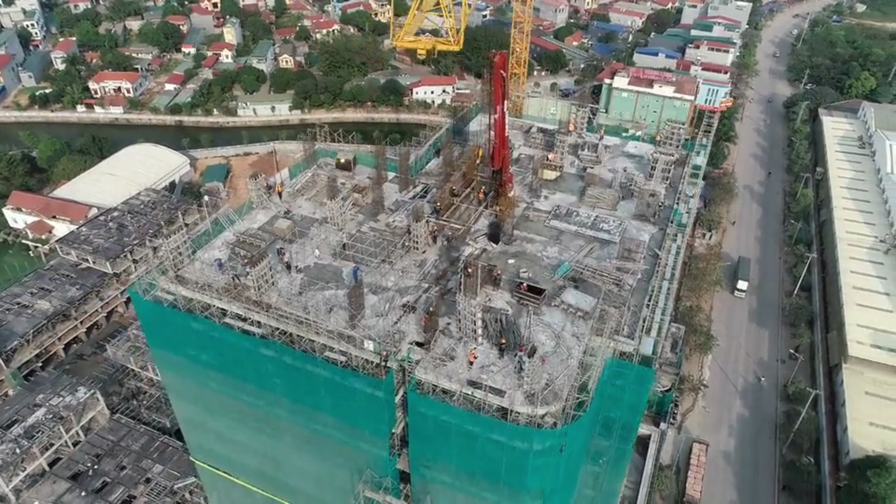So falls, being struck by an object, electrocution, or being caught in between equipment. These are the four most common causes of accidental deaths and other injuries.

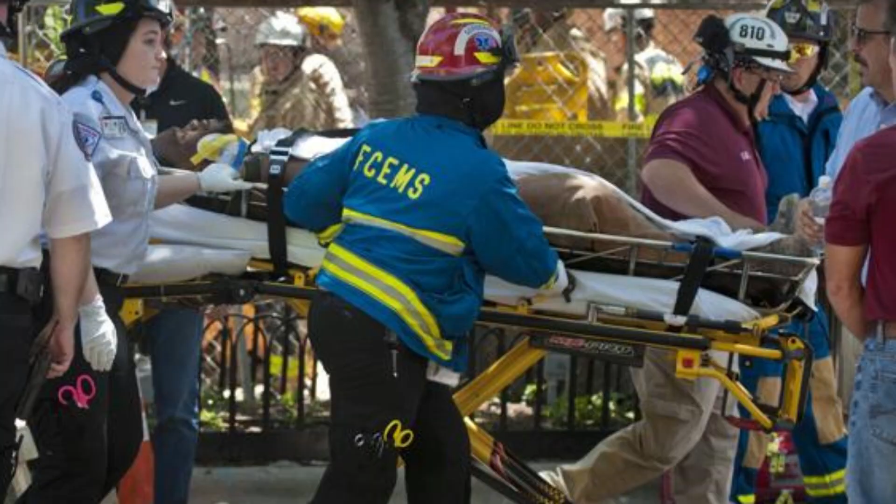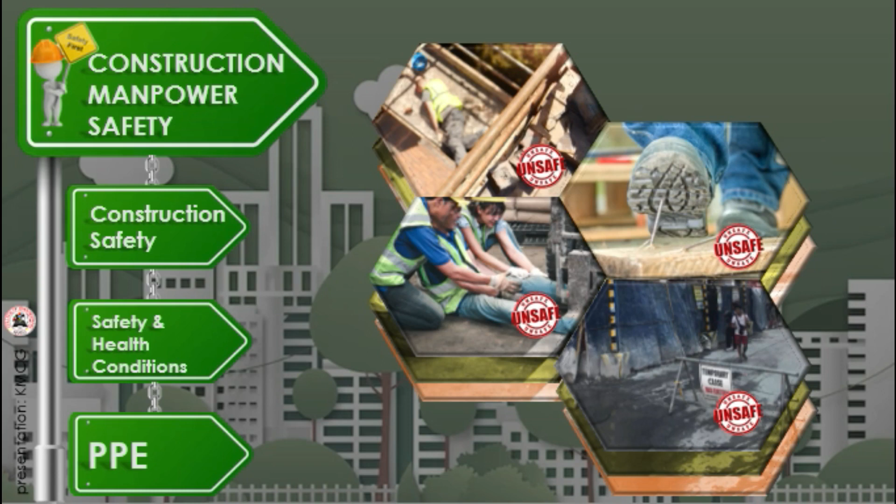Inadequate safety protocols can allow objects to fall on innocent bystanders, putting people not even connected to the project at high risk. So having a culture of safety practices and awareness reduces the risk of these types of accidents.

As discussed in your course subject, you might have encountered this set of safety terminologies, but we'll just take a review. Accident.

This is an undesired event that results in harm to people and also damage to property or loss. Incident is a term used under circumstances that could have resulted in harm to people, damage to property, or loss. In short, incident is a term used for near-miss instances.

Safety is the control of hazards to attain an acceptable level of risk. Control means to regulate or restrain. Risk is the chance or likelihood of physical and personal loss.

Hazards are unsafe sources of practices or conditions that, if not controlled, may lead to the occurrence of an accident or an incident.

Unsafe practices or unsafe acts are behaviors which could permit the occurrence of an accident or incident. Behaviors. Unsafe practice or act is also a deviation from standard procedure or practices.

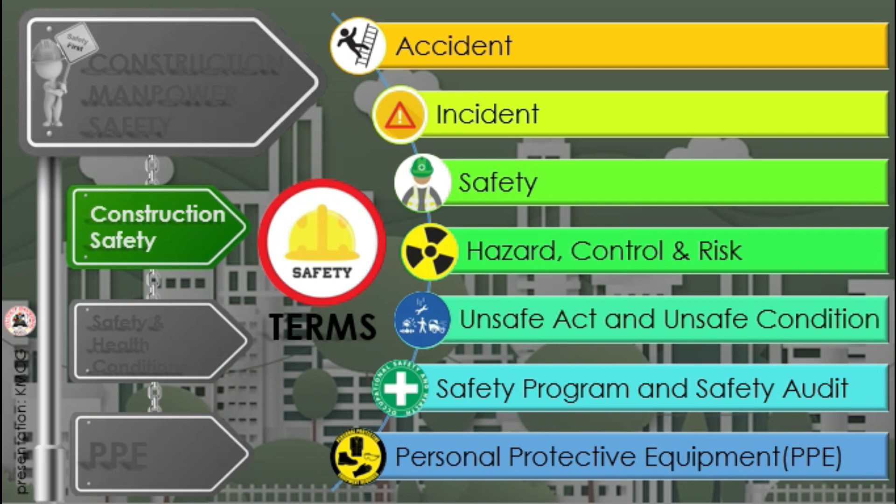These are wearable devices used to protect workers from injury or illness resulting from contact with chemical, radiological, physical, electrical, mechanical, or other workplace hazards. PPEs are also equipment that creates a barrier against workplace hazards.

Examples of unsafe acts versus unsafe conditions are as follows. Under unsafe acts, we have operating equipment without authority, while unsafe condition is inadequate guard or barriers. Unsafe act: failure to warn. For unsafe condition: inadequate or improper protective equipment or PPE.

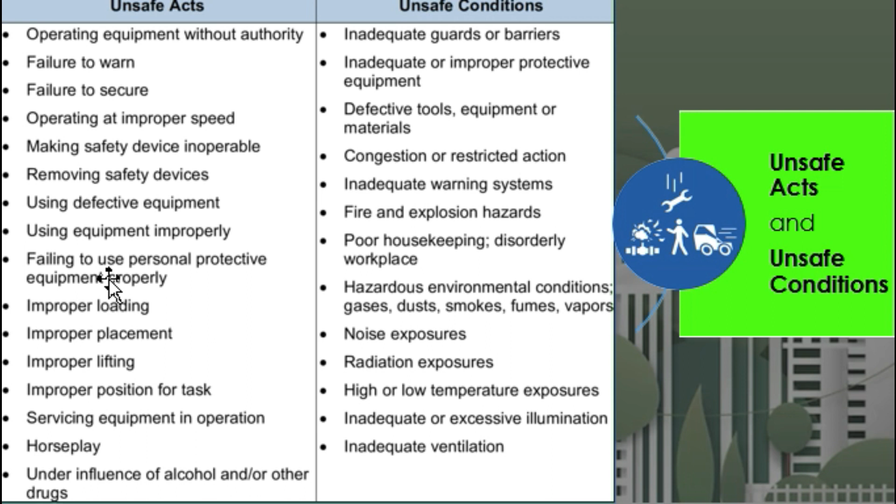We also have failure to secure for unsafe acts, while for unsafe condition, we have defective tools, equipment, or materials, etc.

Next, we have the facts and figures from OSH in the construction industry. 17% of the surveyed companies have experienced death in their present workplace. 71% have no first aid station. 72% of the workplaces do not have trained first aid personnel. 6 out of 10 claim that PPE were not issued to them, which is the liability of the contractor.

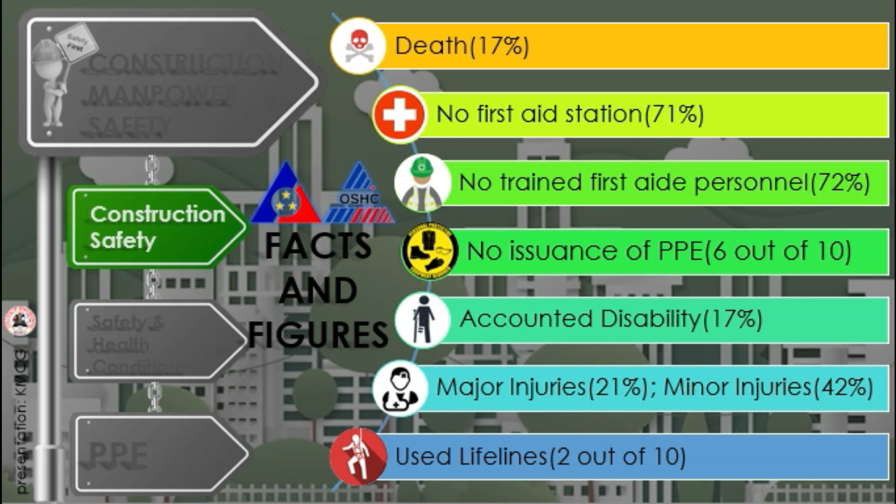17% of the surveyed companies accounted disability. 21% of the surveyed companies reported major injuries, while 42% have minor injuries occurring in their surveyed job sites, and 2 out of 10 used lifelines.

All accidents, whether minor occupational incidents or major accidents, cost money. It is normally straightforward to identify and quantify direct costs, such as emergency response expenses and regulatory fines, but there are often indirect costs which are hidden, less well understood, and seldom easy to quantify.

For example, it may be a simple calculation to work out the direct cost of wages that still need to be paid when an injured employee is off work for a week, but that is just the tip of the iceberg. It is much more challenging to estimate the indirect cost of redistribution of the injured party's workload, the selection and training of a replacement, or even the effects of reduced morale amongst the workforce.

Hidden cost of accident. We have here an iceberg. For direct cost, we have the medical and the compensation - that is the tip of the iceberg. While under the surface, we have the indirect cost, which are time lost from work by the injured, lost time by fellow worker, damage to tools and equipment, time damaged equipment is out of service, spoiled work, lost time by supervisor, hidden cost, loss of production, litigation cost, and also damage to corporate image.

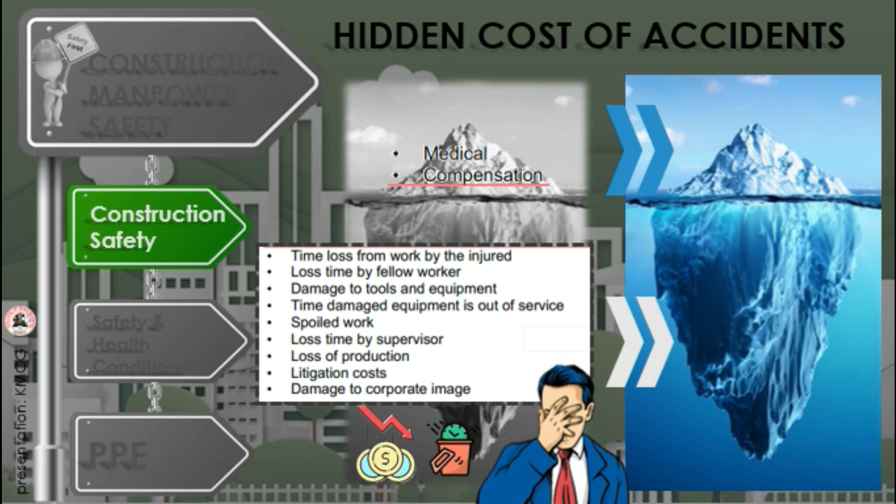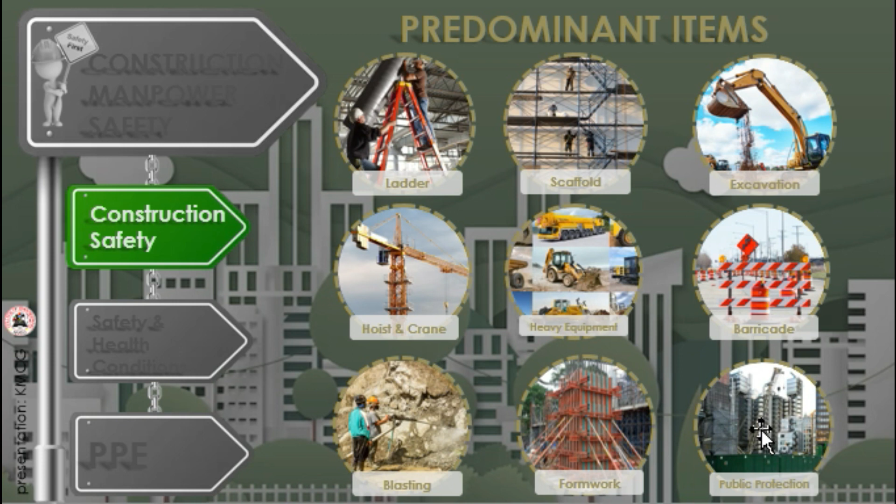The predominant items in construction safety are as follows. We have the ladders. Next, we have scaffold, excavation and shoring, tunneling, hoist and crane, heavy equipment, barricades, blasting, and then formworks. We also have public protection, which includes signages, safety netting, fences, and permitted hours of work also.

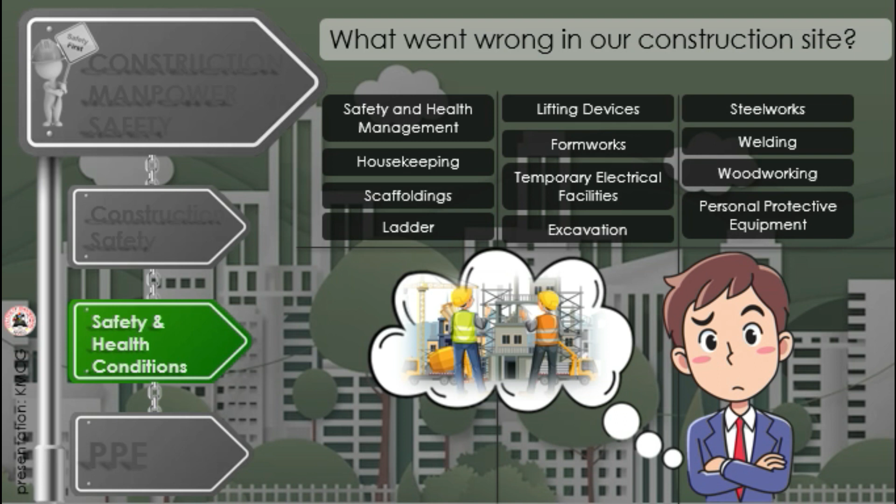Construction is a high-hazard industry that comprises a wide range of activities involving construction, alteration, and also repair, rehabilitation, or improvement. Construction workers engage in many activities that may expose them to serious hazards, such as falling from rooftops, unguarded machinery, being struck by heavy construction equipment, electrocution, and also chemicals, silica dust, and asbestos.

In order to provide a safe and healthy working environment, take time to observe the following instances which might be involved as a source of hazard. We have under safety and health management - unsafe practices may start due to poor compliance on the OSH committee or organization of the safety health committee.

Then we have recording and reporting of accidents or illnesses, poor compliance on employment of safety and health personnel. Then we have provision of adequate first aid medicines. For under lifting devices, the safe working load might not be indicated - this must be shown especially on the equipment's capacity or the SWL.

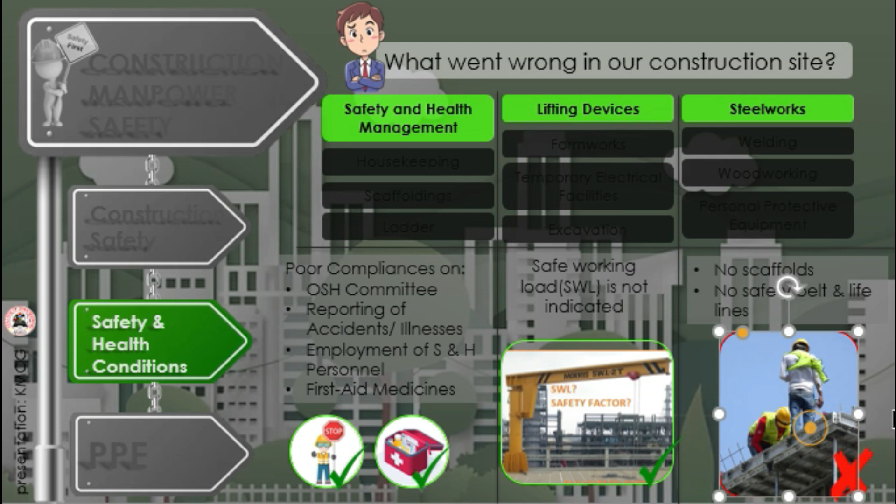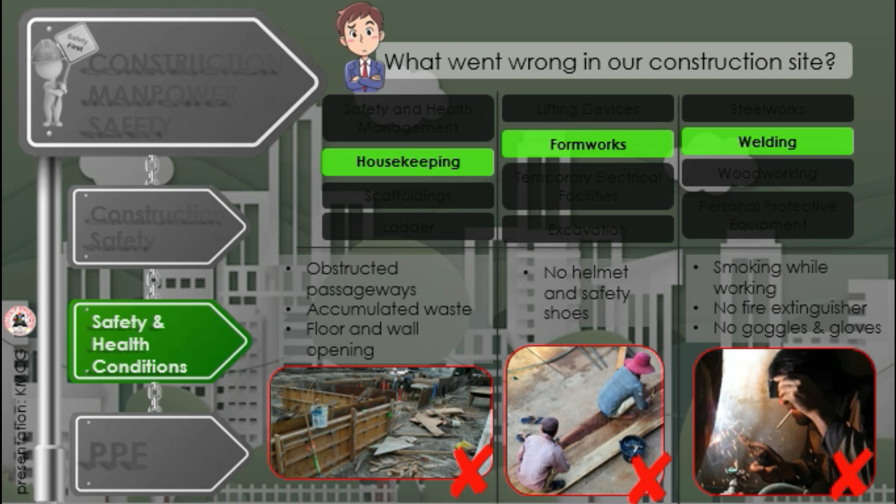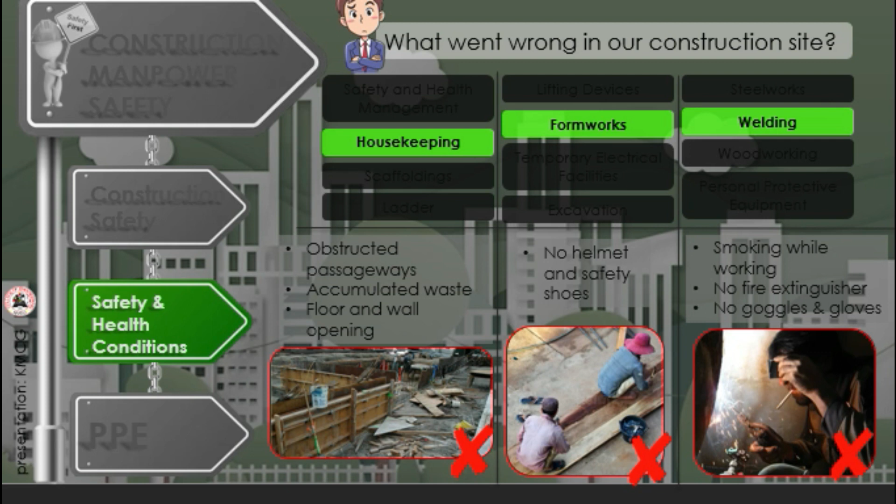Next, under steelworks, workers must be provided with scaffolds, and there must be safety belts and lifelines. Under housekeeping, obstructed passageways - one problem could be accumulated waste, and then floor and wall openings. Under form works, there must be provision of helmets and safety shoes, and there must be proper handling of tools also. For welding and flame cutting, smoking while working is prohibited. There must be provision of fire extinguishers and also goggles and gloves for our welders.

For scaffolding, what went wrong in our construction site? There could be a problem with the provision of guardrails or midrails. We have also the toe boards, problems in providing access ladder, cross bracing, and anchorage.

Under temporary electrical facilities, undersized service entrances are also a problem. Improper spacing of wires, wires installed in scaffolds, and also live wires on wet floor or untaped splices, open safety switches, burned out fuses replaced by copper wires, and improper grounding.

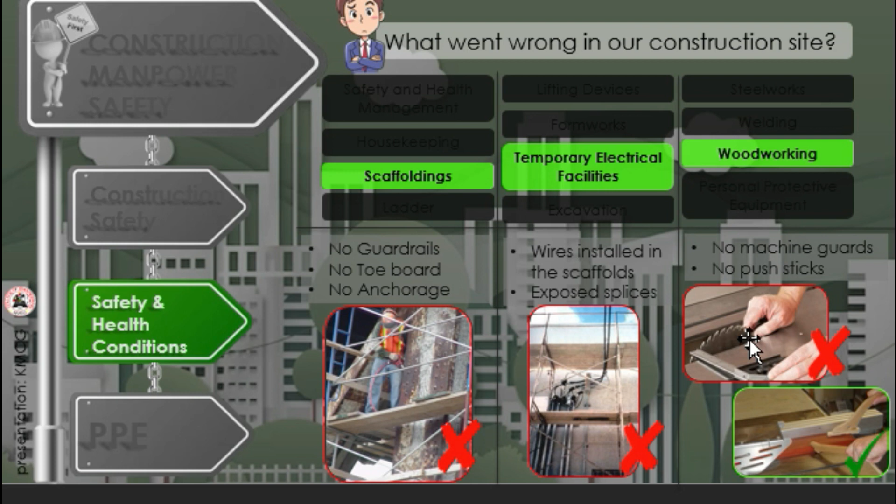Under woodworking machines, problems would arise if there's no mechanical guards or machine guards, and there are no push sticks, for example. Under ladders and stairs, problems arise if your materials are defective, if there are unsafe positions, or the ladder doesn't have a handhold. And under excavation, problems arise if there are no barriers around excavations, if equipment vehicles are parked near the edge of excavation, your excavation doesn't have shoring or timbering, and also no access ladder.

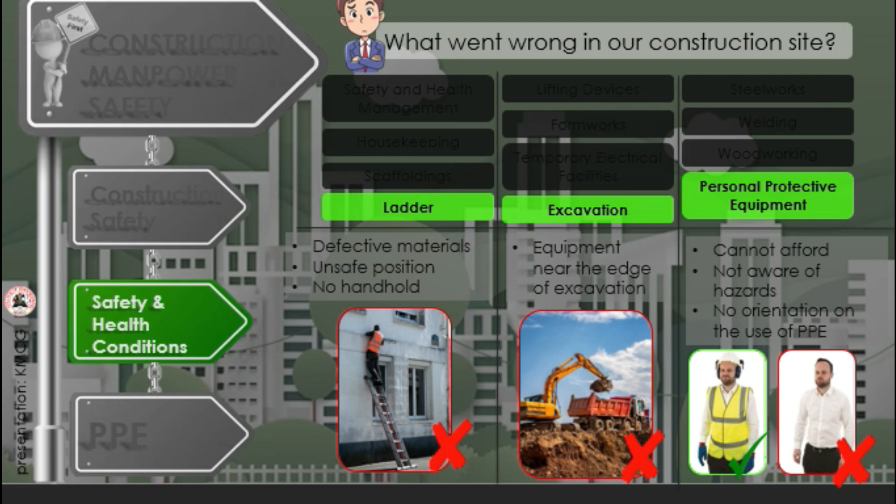PPE, or personal protective equipment, refers to the protective clothing, helmets, goggles, or other garments or equipment designed to protect the wearer's body from injury or infection. The hazards addressed by PPE include physical, electrical, heat, chemicals, biohazards, and airborne particulate matter.

The types of PPE: we have head protection, eye and face protection, hearing protection, respiratory protection, arm and hand protection, foot and leg protection, and also protective clothing.

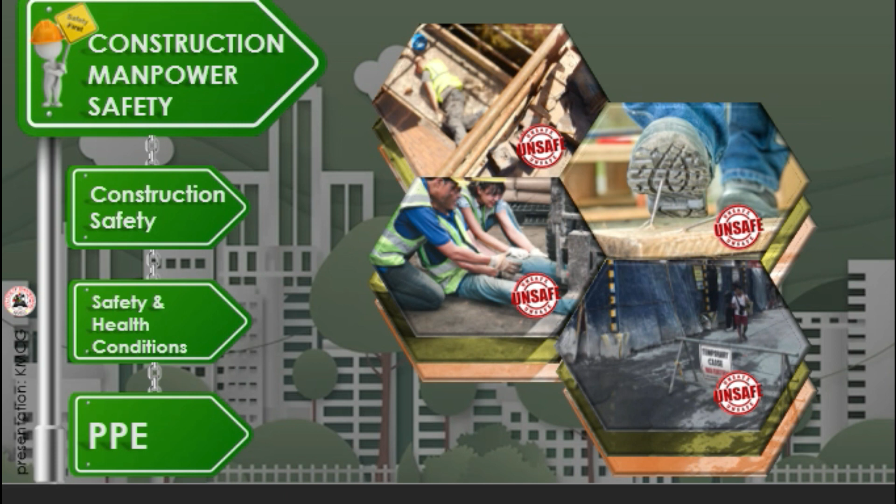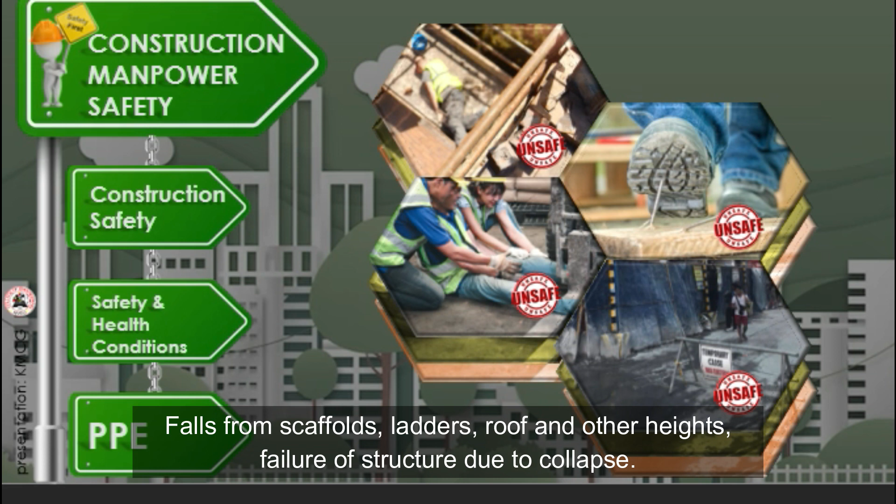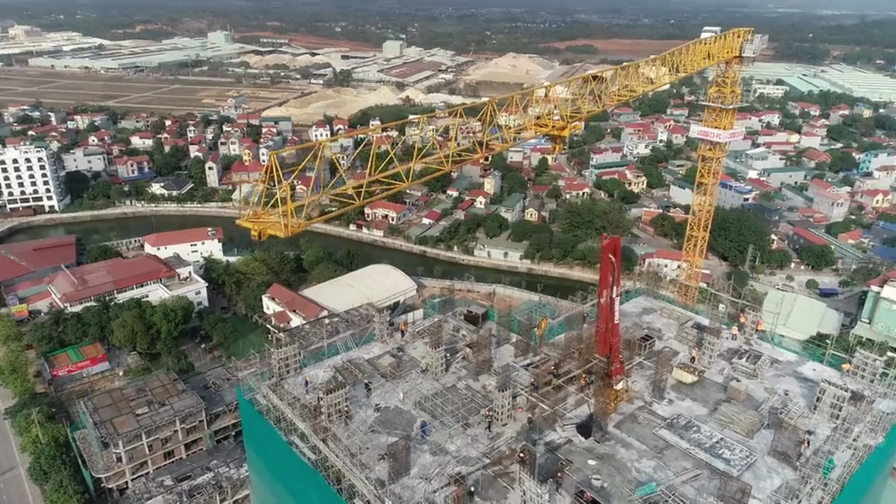In conclusion, construction includes a large number of methods like demolition, earthwork, digging shafts or tunnels, concreting, structural steel erections, drilling, piling, welding, and electrical fittings. All methods are hazardous and performed under normal working conditions by unskilled workers. Falls from scaffold, ladders, roof, and other heights, failure of structure due to collapse, damage due to fire, and other mishaps may result in safety failures. So, if you plan to have a successful project outcome, considering construction manpower safety is a must.